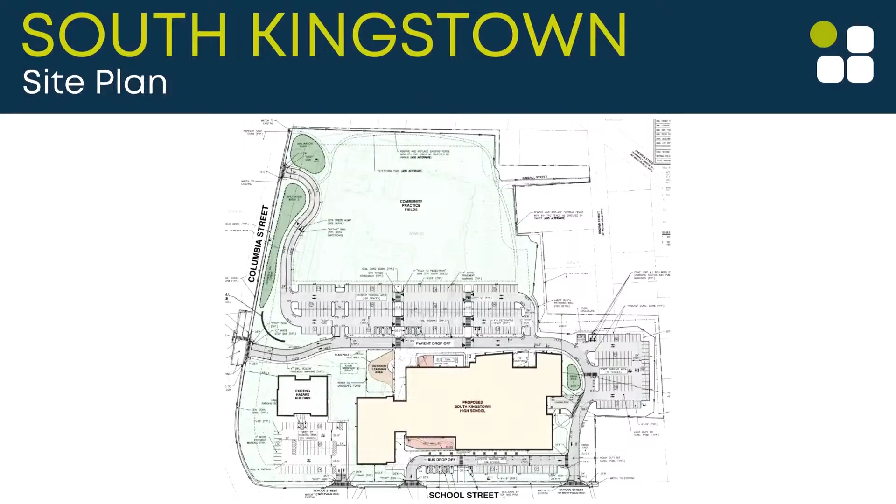With that, I'll turn it over to the design team to go through first the site layout and then walk us through the floor plans. These have not changed much since the last presentation, but we'll review them again to make sure everybody's familiar and up to speed, then go through our approvals.

I'm noticing right off the bat this isn't the latest site plan, so we should make sure, both on the website and with us, that this is updated. I'm looking at the dumpster location and a few bits we presented to the planning board, so we want to make sure whatever we put out is consistent. Will do, thank you.

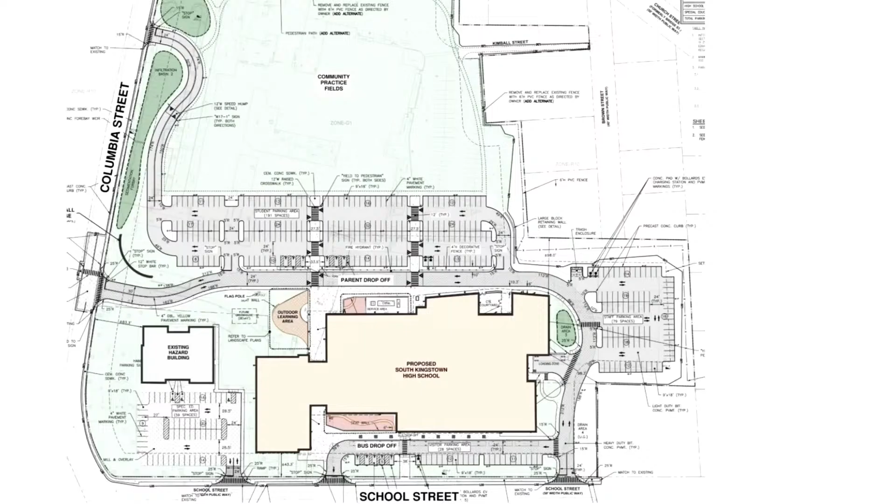The planning set that was submitted is on the website, and that's what we presented last week and received approval for. As Kate mentioned, the plan hasn't significantly changed other than relocating the dumpsters from the property line back towards where the cursor is in that area. The planning board meeting, if you had a chance to listen, was very thorough—felt pretty good about the comments we received. We'll work with the administration through the final planning approval process.

I want to answer any specific questions you all may have about the site. Anything you don't understand, feel free to ask now. Just a few things I think we should review, because not everyone was at the planning board meeting and some things have changed a little bit.

The vehicular flow for parent drop-off was one thing that was done late—I think we should bring that to the group's attention. And then any of the landscape discussions and commitments made with the planning board.

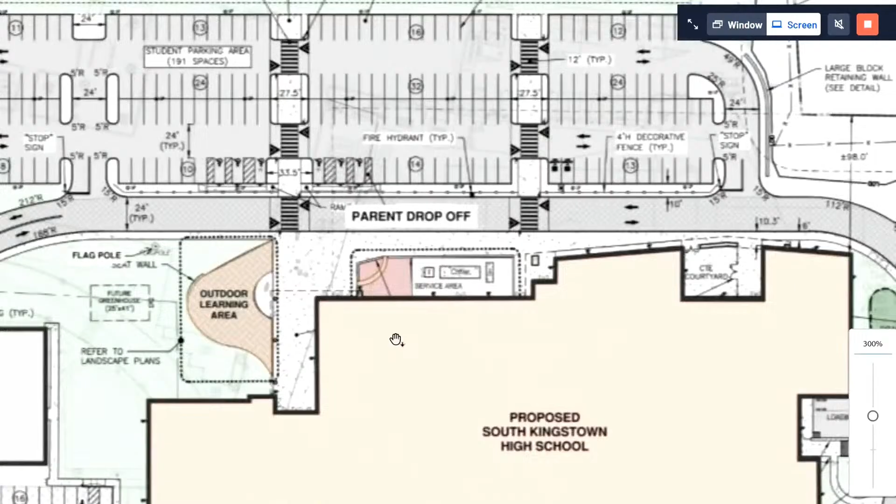Sure. One thing we talked about was improving pedestrian safety for students during pickup and drop-off. So if you look at the area marked parent drop-off, that section of road between the entrance on the left side to student parking and the entrance on the right side to student parking—during pickup and drop-off, that will be one-way only. That allows a disabled vehicle to go around, and also keeps people from dropping off students in the other direction and having them cross in front of vehicles. That was one of the features we modified and presented at the planning board.

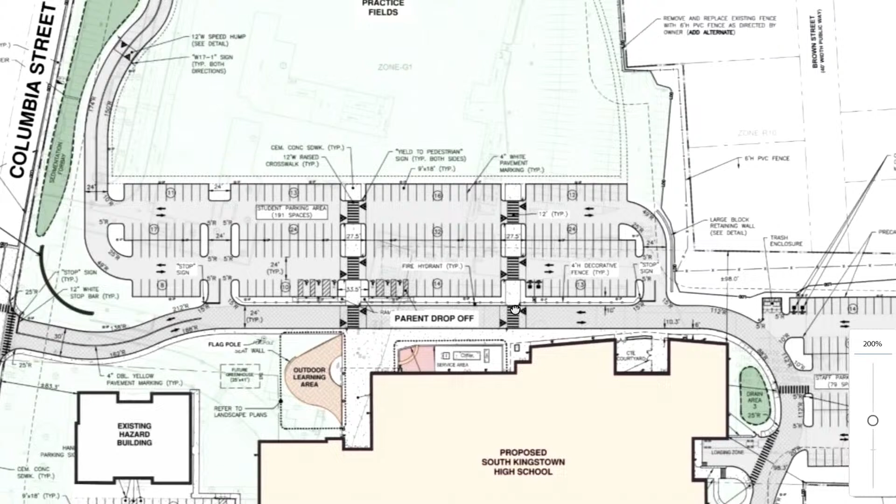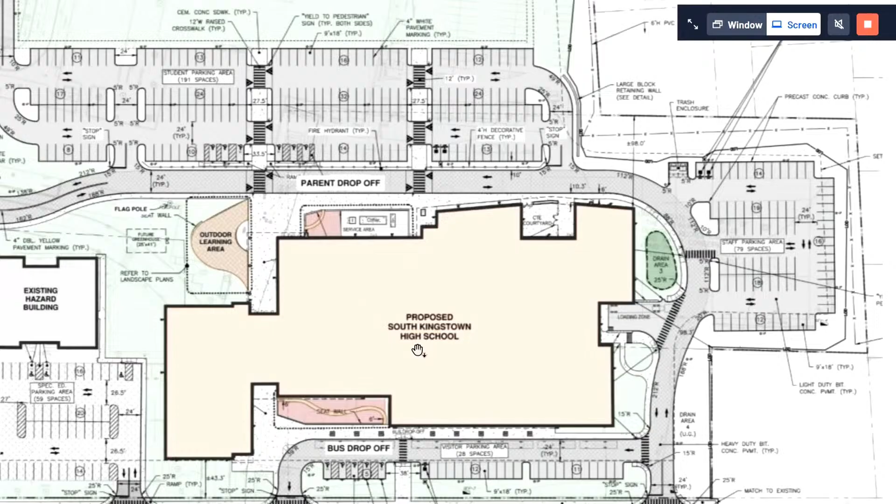The other is the landscaping. We did have to enhance the extent of landscaping—some additional trees and additional understory around the front of the school, along School Street, and along the student access drive. As mentioned, this package comes very late in the project, where we typically know where we are from contingencies from other previous buyouts, but we did commit to some enhanced landscaping in terms of trees and understory.

So to clarify with the parent drop-off—that is a two-lane road, but during 7 a.m. to 7:30 a.m., and then again in the afternoon, there'll be signs posted during these hours. The flow comes in and goes out—the flow never changes. What it does is just prevent oncoming traffic during pickup and drop-off along that section of road.

So there's an operational component to this as well as a signage component. Yeah, that's what I was going to suggest—it would be more a matter of training the people who then train the parents and visitors that this is what happens during these hours.

We did have a traffic consultant present along with us last week, and they have a report we'll be including in our submission to RIDE. That was an open item for them that we'll be able to close.

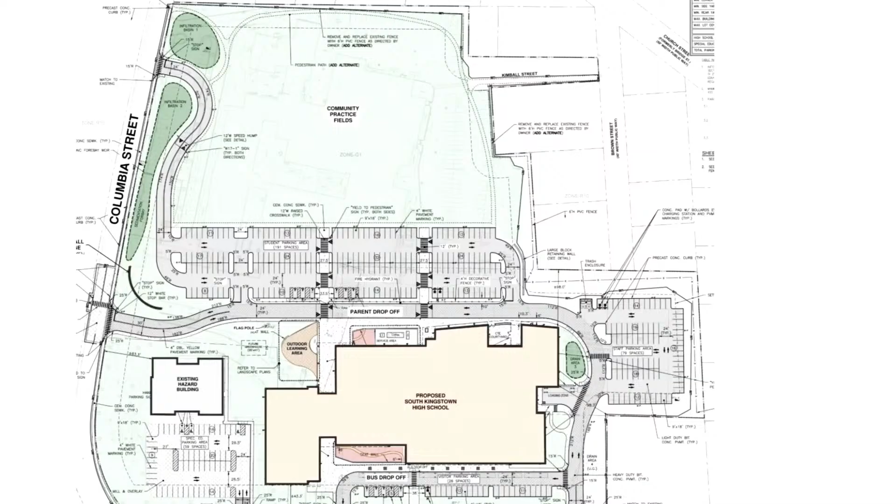So, Phil, if I have this correct on the traffic flow—the one-way operation will go from Columbia through the parent drop-off area and then exit out onto School Street, is that correct? Essentially, if a parent enters from School Street, they will not be able to drop off there; they will have to go into the student parking lot. If they so desire to drop off their student there, they can, but then the student is crossing not at appropriate crossings during pickup and drop-off. What we don't want is a parent coming down the same road that parents are going the other direction on, dropping off and letting out students, and having them cross not at a crosswalk but indiscriminately along that lane.

Got it. And a big part of this is going to be operation and how we train our drivers about certain times of the day.

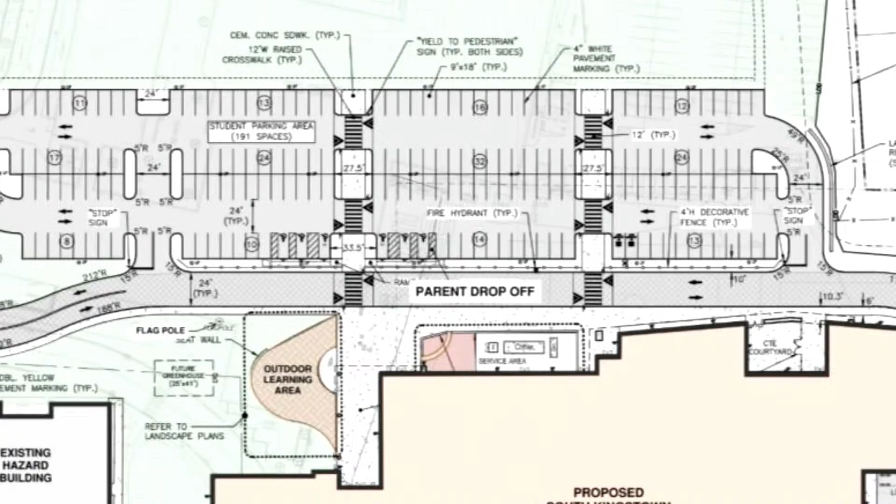I really think this is a very good site plan in terms of vehicular and pedestrian traffic. We have multiple egress points that make a lot of logical sense. There's nothing really illogical about this entire concept. That one component we just talked about is just another additional element that we're able to provide for the safety of the students, that's all.

As Luke had mentioned in his email, we only had one abutter who presented at that meeting, and we were able to address his comments. Okay, thank you. The only thing I'll say is on Thursday at the public forum, we will present the appropriate site plan.

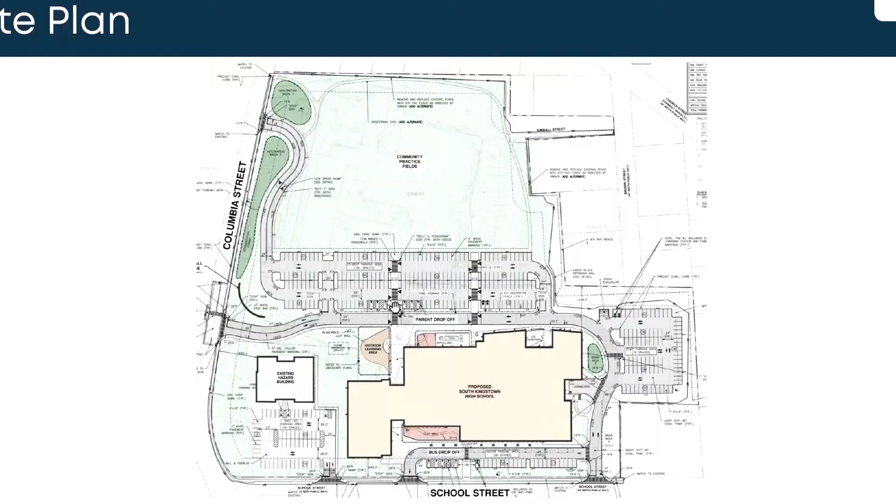He has it, okay. I was like, that's okay. I can't see that far. I brought my glasses just in case. I can see that far.

All right, nice to see you all again. I'm trying to think back to when the last time you saw this was. It probably hasn't changed a lot since then. All the key components are still in the same place.

The 3-story academic tower is still that yellow and blue on the left-hand side. The darker blue area is administration as well as nurse, with a few others, and the guidance suite is also in there. The lighter blue at the top is the cafeteria commons and the kitchen, so those two L-shaped spaces work in tandem. The big green space is all fitness and athletics and the gym, which has worked out pretty well as we've been recrafting things.

We had some issues with how our showers were laying out, but that seems to have worked out really well. We'll be seeing Terry on Thursday. The red spaces up in the upper right are still the CTE spaces for construction technology.

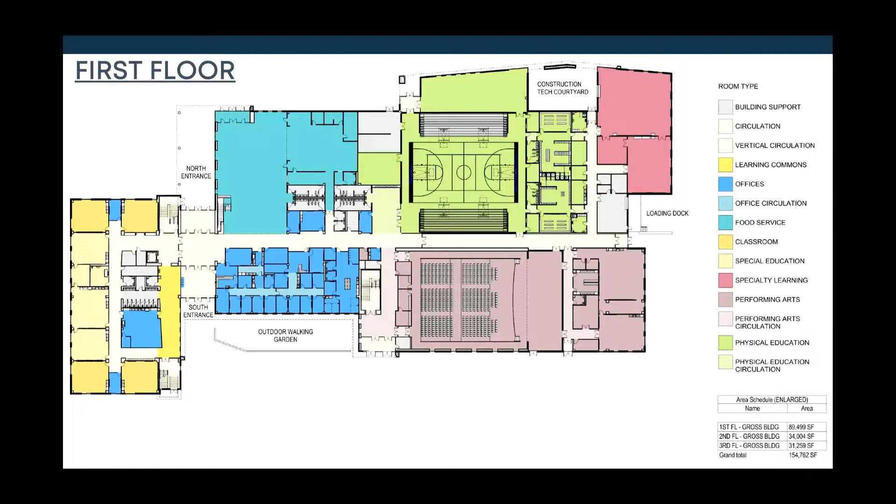To get big item props, construction pieces transported properly, without having to go outside, because they do create scenery and other stage prop pieces. There's a real nice synergy between those groups, and we have oversized doors, height doors, as well as tall corridors, so that can all take place without having to go outside and around, which you could still do, or really dragging your way through the building.

So if we go up one more floor, again that academic tower is primarily classrooms, the big blue space in the middle is the teacher workroom. So that space stacks on all 3 floors.

I probably should have talked about the darker yellow stripe to the right of that, which is a learning commons. Students would be allowed to come out into that space to work on projects. Chip has described it before as, instead of having them go out and sit on the floor in the hallway, they actually have a space with appropriate furniture.

Their supervision comes from the teacher room, which should always have somebody in it. We have a lot of windows onto that space, so supervision of what's going on over there comes from a variety of places, and it'll be a nice bright spot for students.

The purple spaces are art spaces, and the red one on the end is actually a combination art and CTE space. And then the media center is across the hallway from that, and it has the overlook into the 2-story learning commons cafeteria.

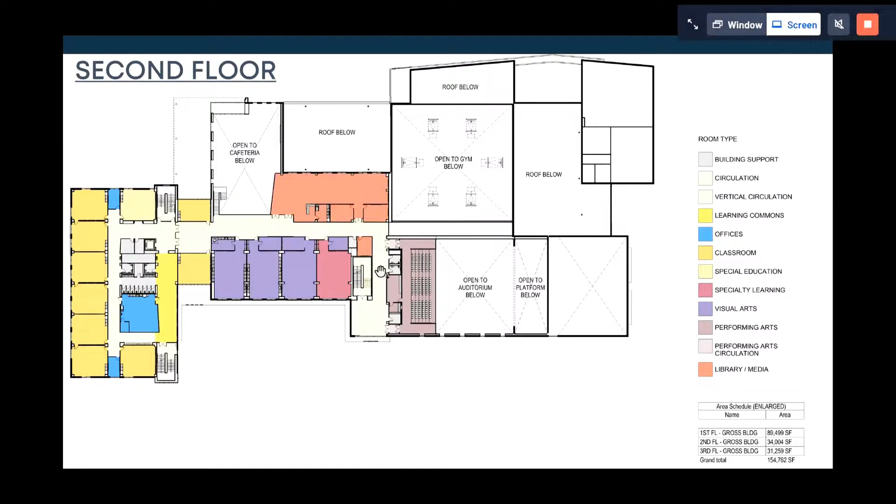And obviously the balcony—I should never forget the balcony. It's still there. Then the third floor has the same footprint for the most part, with the exception of the science spaces, shown in butterscotch, and the redder spaces which are CTE programs. Those all live together in that wing and have a lot of synergies between the activities going on in them. So that seems to have laid itself out really nicely.

Any questions about how this is all coming together?

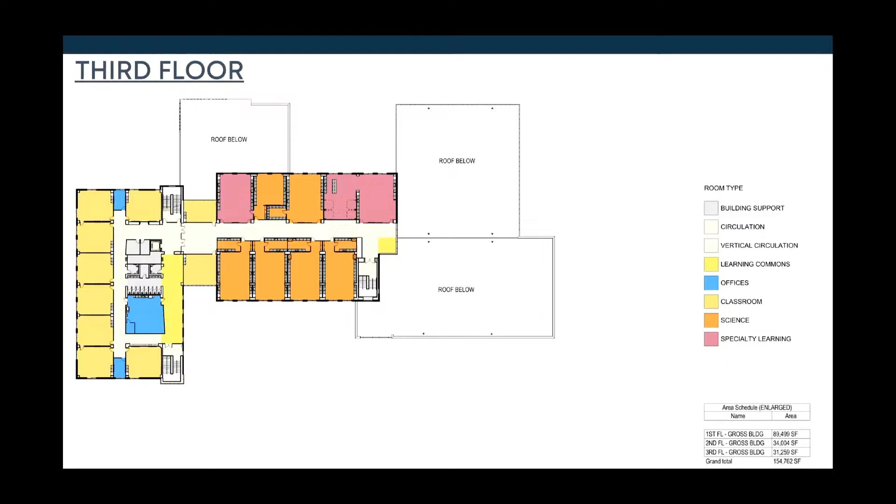Do we have the exterior renderings? Okay.

I'll preface this by saying there'll be a little bit of tweaking as we step through the VE items mentioned before—nothing substantial, it's still going to look very much like this. We got a little bit, and actually this side stays almost entirely intact.

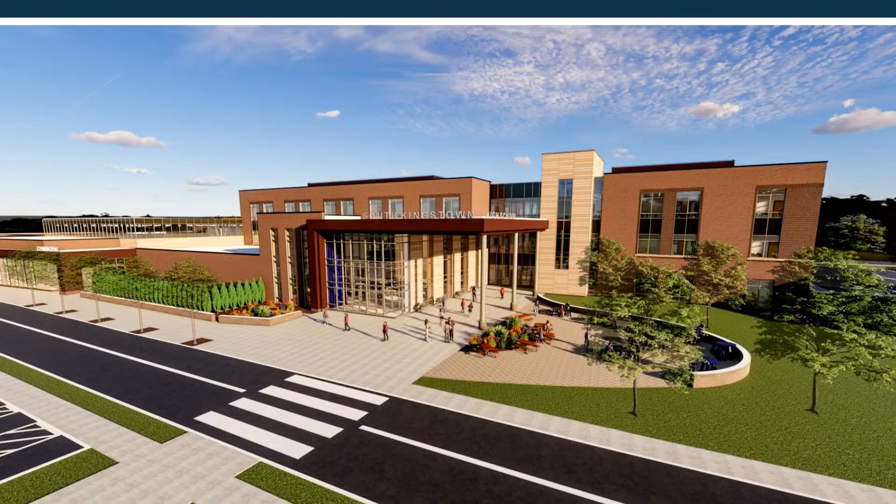So this is the back, where students are going to get dropped off. That tall space with the glass in front is the end of the cafeteria, a two-story cafeteria. The glassy three-story connector at the end of that overhang is on the first floor, where you're coming in from both sides—it's really light and bright, with transparency all the way through the building. The tower piece is the stair tower, and the stairs go all the way to the roof, which will be nice for maintenance people who need to get up there with equipment and tools.

We do have some screening of mechanical equipment on the roof, and a really nice outdoor teaching space, as well as overflow space for students who are allowed to go outside during lunchtime. They can be in that horseshoe-shaped outdoor space with a seat wall and other ways to contain them so they don't wander off the reservation.

So if we go to the next one—doesn't want to go. So this is a close-up version.

I think the other one that comes after this steps back a little ways, but that is the main entrance from School Street. Right now we're talking about having a garden, which could be used before or after school, but also when there's an event in the auditorium—if people come out at intermission and want a place to sit at a bench, take a little walk, or do whatever they do with their phones off to the side. It also gives some nice native buffer vegetation between traffic and the building, with a little row of trees.

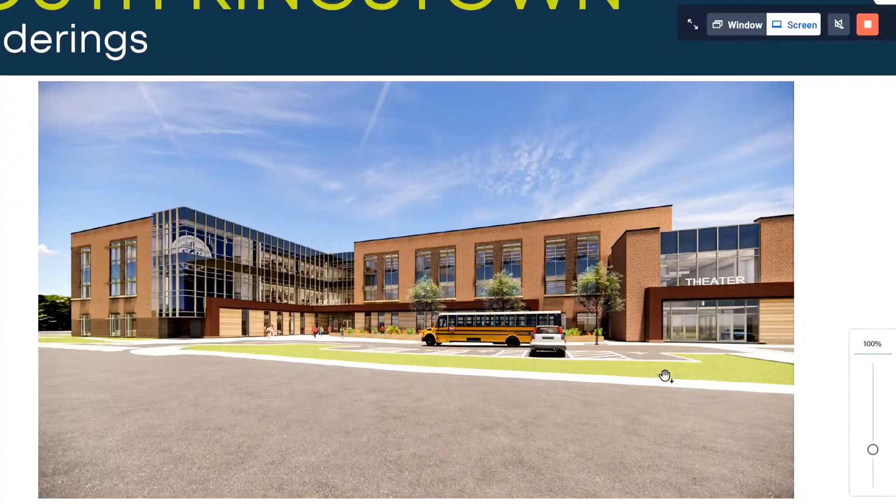So here's the backed-up version of where we just were. One of the things we're looking at changing a little bit is there's a big swath of glass on the left-hand side, second and third floor—it's a little too much glass. So it's one of the places we're looking at for the 10% reduction in glazing we were asked to take a look at. That's going to get tempered a little bit—it's not going to all go away, just treated a little differently.

But the rest of it—the theater entrance is still there, the main entrance is still there. We're going around the building tightening things up here and there. I think that's the last one. I'm not sure—so I have a question on this view.

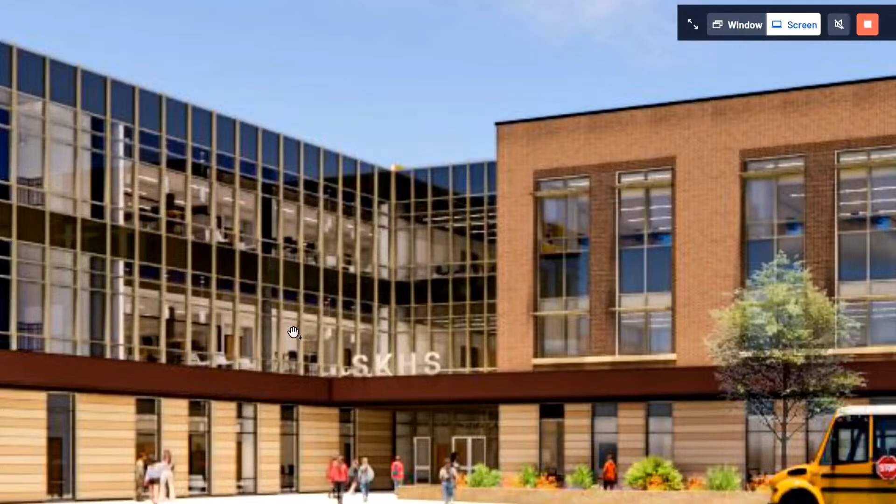So the front here is the stairwell that goes all the way through the building to the other side—yes, that will still be transparent like it is on the corner. And then inside that little L is where the Learning Commons is, like where it says SKHS right above that, that darker yellow strip we saw. Yep. And so we kind of like the treatment downstairs a little better, where it's not completely transparent through to that Learning Commons space.

So this will give a little bit of space, it'll actually provide some places where they can put whiteboards and things on the walls, so when they have breakout spaces out there, they're a little more usable.

So my only other question is when it comes to that SKHS and the theater lettering, is that going to be part of it, are those going to be actual letters, or is this just saying 'this is the theater'? No, we're intending, unless there's a reason to change them, which we can talk about, that they would be actual letters standing up there. We probably need to tweak the color, whatever the color of them becomes.

Yeah, I was just curious because they were a little hard to tell in renderings, sometimes they block things, because if we make them dark, they disappear and you can't tell that they were there at all. As opposed to in real life where they do stand out.

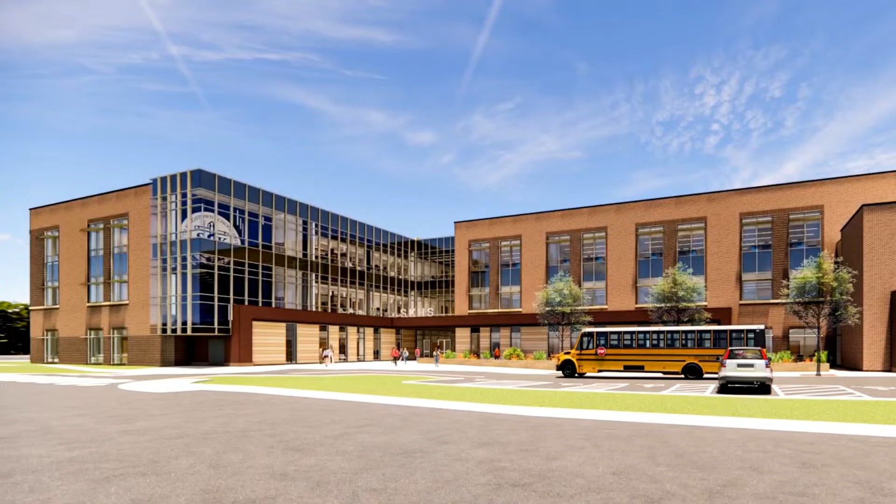Okay. And where you were talking about the stair tower, the very glassy corner farthest to the left, we had talked last time, or Mark had talked last time, about the blue on the outside of the building moving inside. That's one of the places where, if everybody's in agreement with making a blue statement, it would be an indoor place that's pretty prominent from the outside, but because it's inside the building it's a little more protected, and we can get the right color and make sure it doesn't change over time like some outdoor materials tend to do with those deep blues. They're not as stable as we might like.

And that's a stairwell, right? That is a stairwell. You can sort of see in there the little bit of stair coming up and going down. Does anybody have any questions or comments?

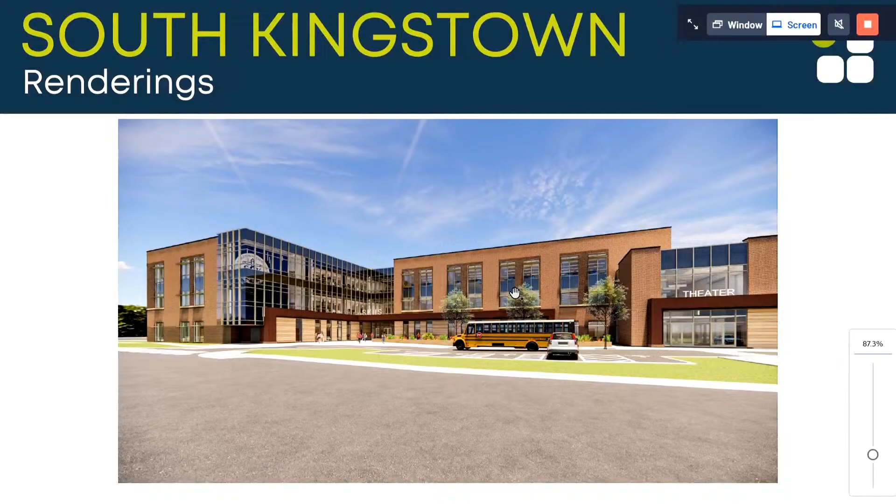Could we go back to either the floor plan on the second or the third floor? Sure, our navigator will get us there. Sorry, Lou.

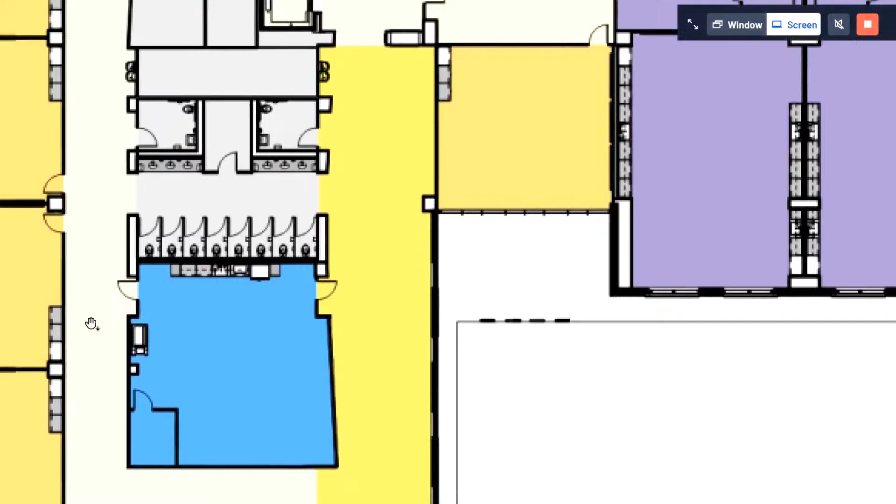There's the second floor. Could you give me an idea about the scale of that common learning area? The yellow? The yellow to the right, yes. So that is, let's see, a typical corridor on the other side. Can you zoom out just a little bit farther? So the corridor on the other side would be... yep, how wide? That's what I want to see.

So that's like 10 feet wide on one side, and 8 feet wide on the skinny side, where the little hand is. This starts at 12, and I think it gets to almost 16 when it flares out a little bit up towards the top.

Okay, so one of the things we're going to have to work on as we move forward, in conversation with the fire marshal in particular, is they often ask us to mark the floor so that everybody, students and everyone else, understands that the movable furniture doesn't get dragged over and left in the aisleway that's meant for egress. We typically do that with a flooring change, which is pretty easy for everybody to understand. Keep it on this side, not that side, because that is important, since it's an egress path to get down to that stair tower. Got it, okay. Yep, thank you.

Sure. How come it's tapered like that? Because the design team liked the flare they got on the little corner down there. Architects. You're a bunch of architects, artists. Every now and then we have to do something. The flare? You have a little flare I'm sorry at the end there. So you have it, to give him something. Mark didn't do it to the building, so he did it someplace inside. You got to throw him a bone once in a while.

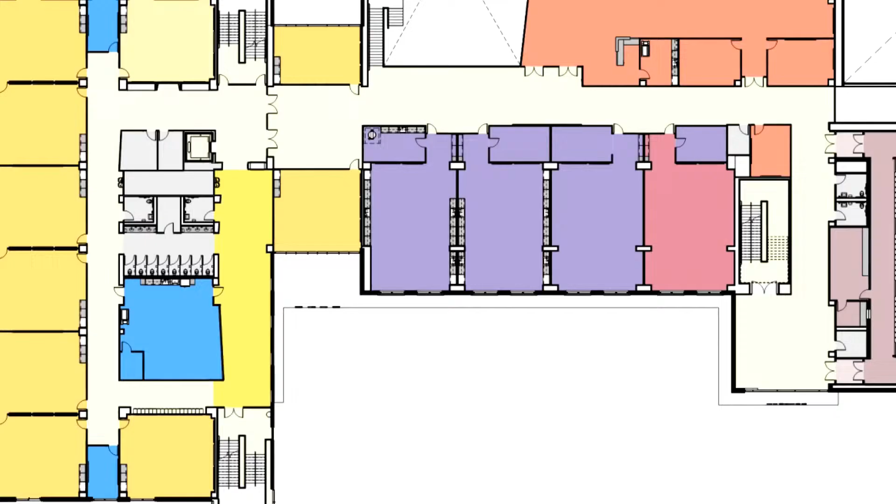The flare of the teacher workspace? Actually both spaces, because the dynamic of that, just that little 3-degree shift on that one wall, will actually change your perception of how that yellow space feels, as well as, there's a lot of glass on that corner of the blue space. You notice it. Okay, all right, I've got that. Yeah, thank you.

And it's not curved, because Tony from Gilbane doesn't want us to build anything with a curve. So straight's okay. Yeah, I actually like the crooked.

But yeah, I agree with reducing the glass so they have some space to work with. Same with the teacher offices, they're not going to want a full glass wall. It's not full glass, but they're going to have... I assume cubicle type setups in there for the offices? I wouldn't call them cubicles, I would call them workstations, not necessarily with walls around them, but yes, they will have desk spaces. I forget how many ended up in each one.

And Chip's on board with that? Yep, understood. Yep, we've worked with him through that.

When you do the flooring change, the only thing I'll say is maybe something like a carpet tile or something, just to keep the noise down. That's going to be a kind of loud area. We need to have conversations with you about what floorings you do and don't want. We've had some schools that don't want any carpeting out in corridors, just because of maintenance. We've had other schools that don't want them anywhere in their whole building at all because of allergies. So we need to have those conversations. We've made assumptions in what's been estimated, but those things could be adjusted.

I like them because when you're putting the furniture down, like say along the wall, separate from the clear fire egress corridor, it keeps the furniture over there. It keeps the tapping feet down. There's sound absorption to it. And then when you put stuff on the walls, panels and stuff, because otherwise it becomes a kind of chatty area and the noise will just bounce all over the place.

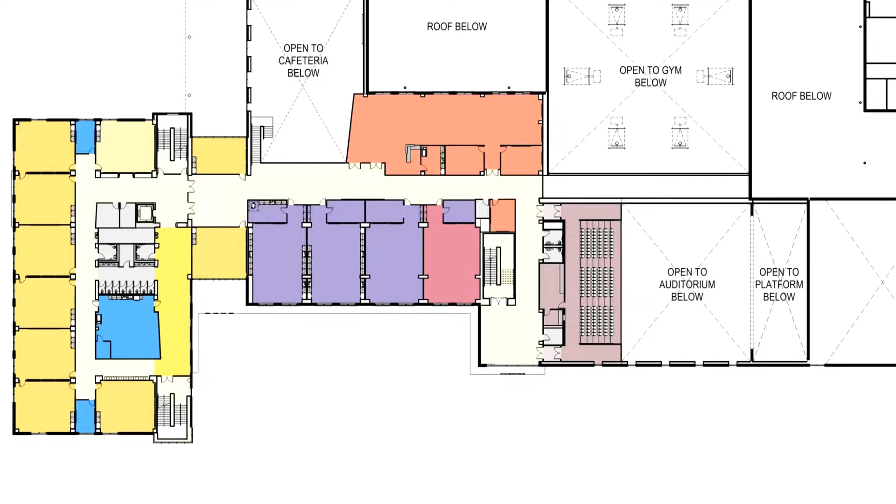Going forward, we haven't shown you anything really on the inside of the building yet - finishes, what it looks like - that's a really big next step. Similar to how we had conversations about the outside of the building and what the materiality of it is, we're going to be having those conversations and then bringing things to you guys to make final decisions off of. So that will be in short order.

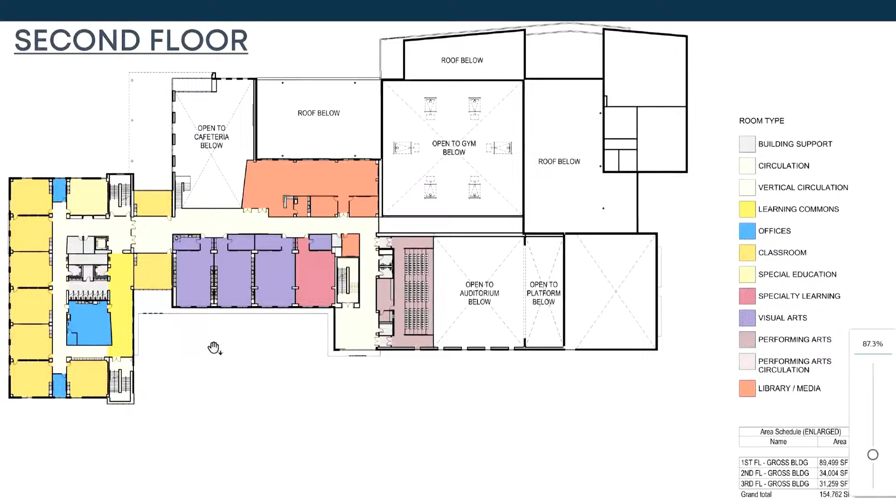Yeah, well I guess the takeaway from there is that we really like the outside now. We're not even talking about it anymore. That's good. I'm so happy to have made it to that point where we can jump in and focus our attention elsewhere. So thank you.

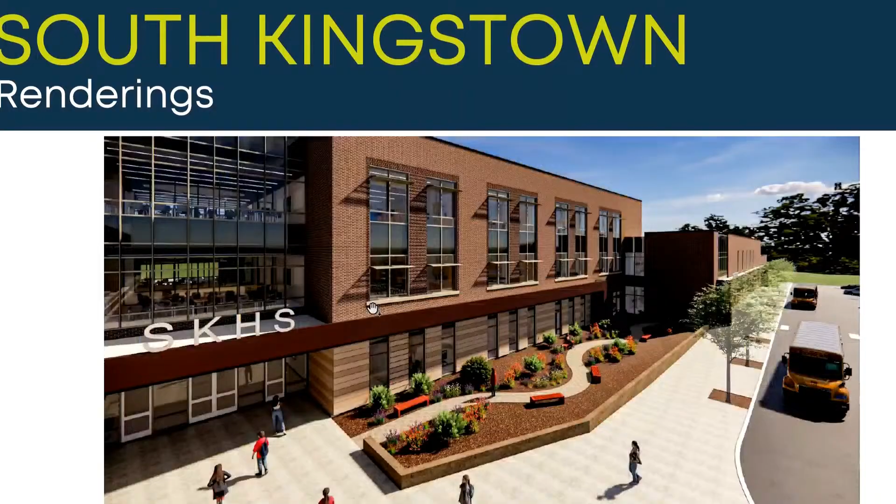Kate, is this an additional, a separate, or did we keep this as a separate agenda item? The cost containment? Yeah, it seems to have merged already into item 4, so we can just keep going through this, and then at the end we'll do item 4 as the actual motion for the recommendation. So we'll just keep it going here.

All right, so the first item that we have - again, these are areas that are continuing to be explored. We are not asking for a decision on this yet. We will come to you with much more information when we do ask you for a decision on this. This is the first item that Kathy was just referencing, the reduction of the exterior glazing. So we're targeting a 10% reduction in curtain wall and storefront. In addition to this, there's another area in particular that I have my eye on, and it's a storefront perimeter around the gymnasium. There are much more efficient ways to get natural light into the gymnasium. So again, these are areas where we're not impacting program. We finally got to an exterior that everybody likes. We don't want to change it. We're not looking to make any major modifications to the exterior. These are select refinements at this point.

I just want to put it out there, I would be interested in hearing the architect - they're going to go back and do it, right? Yes, and I know you're eyeballing above the auditorium. I would like to give them an opportunity to justify it if they do come back with it, to at least explain why. Because I honestly don't know, but I can tell by the gestures and looks that some may not agree with that. That's fine, but I think we need to have that conversation and understand the plus-minus of it all. Yes, absolutely. Again, we are not asking for a decision today. We do not have enough information to present to you to ask you to decide on this, nor do we need to decide on this right now. This is not part of our early release package. This is something we can take our time to thoughtfully design and make decisions on.

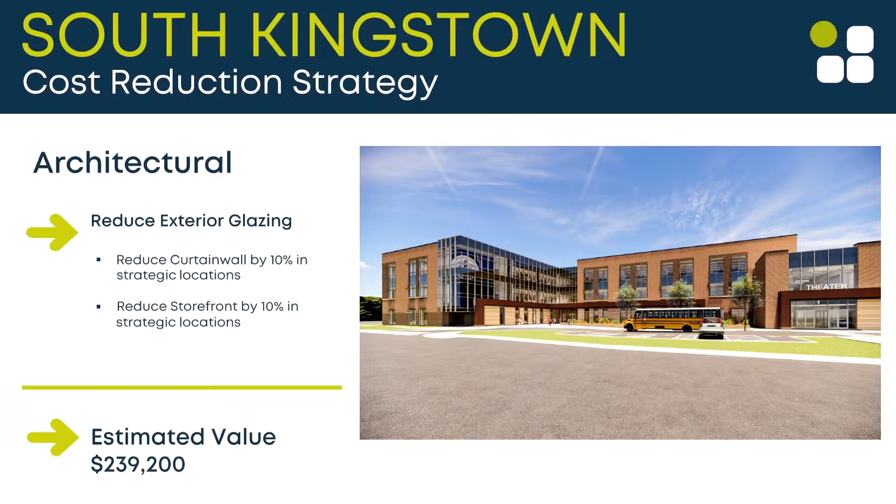The next item is fritted glass. We currently have 100% of our glazing utilizing a fritted glass, which is a stippled pattern. It is a bird-friendly frit, and it also provides a certain level of thermal properties. The design team is studying this. It is not currently part of our energy model. So if we did eliminate it, it was not part of our energy model to begin with. The design team is doing additional due diligence to determine the impact on our energy model by factoring in the frit. At a minimum, we are looking to reduce it. It is currently on 100% of the glazing, which is not necessary. We are looking to identify the most impactful areas for this treatment. The total value of all of the frit, 100% of it, is $600,000. So we're continuing to study its impact on our energy model and looking at strategic reductions.

Is the $600,000 more, or is that the glass cost? No, 600 is just the frit, it's the extra cost. That's it, just the extra.

Well, there's a lot of glass, and we have a lot of dumb birds, and I've been dealing with them everywhere I've been when I have buildings like this. So I'd be careful of getting rid of too many. Or John will be putting up stickers of seagulls on the glass anyway. And they still don't work. So this is an area we are studying, we are not recommending a wholesale removal.

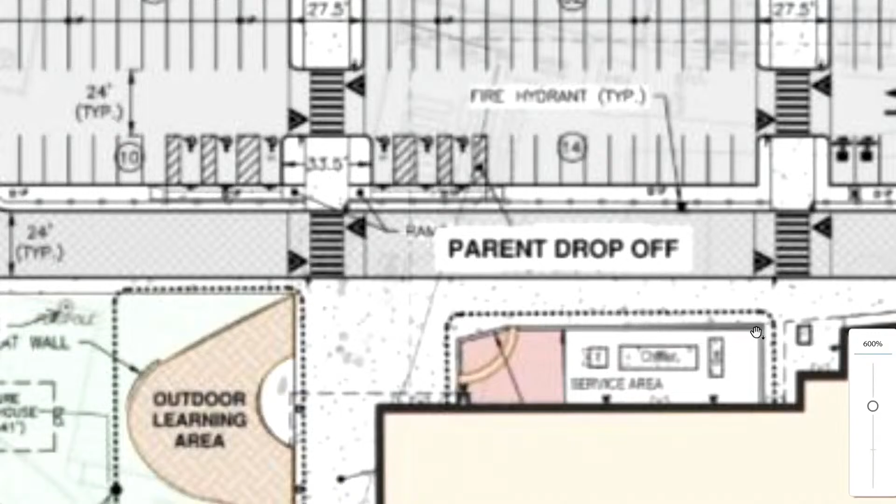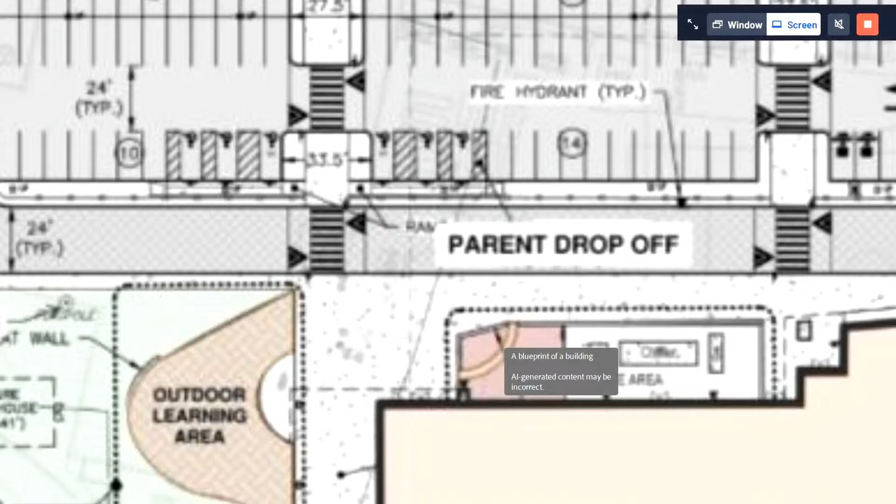Just a suggestion, and while the team's here: there is a seat wall around the service area with the generators. We've talked about this, it should have a fence since it's an area we should not have anybody in. Typically you'd put a fence around this. I don't see a lot of impact on removing that wall, because there are plants specified there that are going to overgrow the wall and get into the utility bins regardless. I'd suggest there's quite a bit of wall there, so the 10% reduction could come out of that, and I don't think anybody would ever notice. That would be my suggestion, because I'd hate to lose anything in the outdoor learning area or areas where people are actually going to sit and use the wall as intended. Just my 2 cents.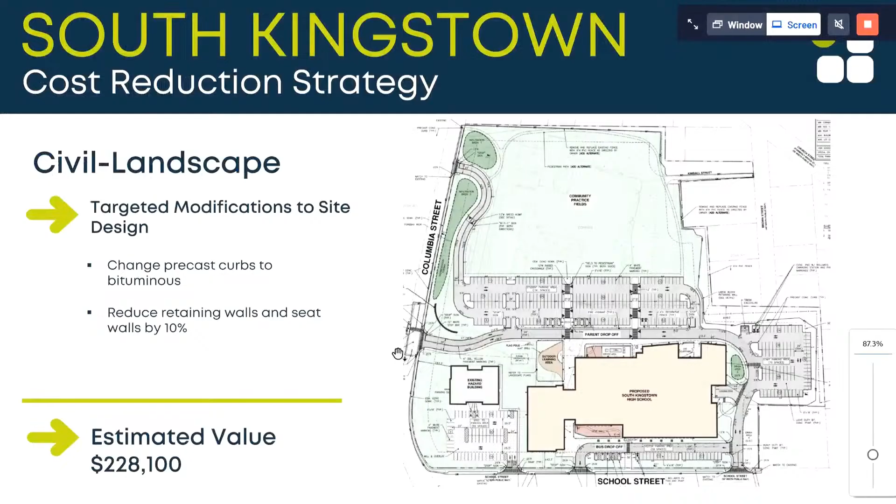And it won't touch capacity? Not capacity, this is rigging, lighting, that sort of thing. Anybody else have any questions, comments, or 2 cents to share?

I'll just add that we are seeing the theater people on Thursday as well. Yes, for the record, the design team is meeting with the theater team on Thursday to review this.

What are the estimators used for? I saw we had like a 10% reduction. Well, I'm thinking in the gymnasiums, with the 6 basketball nets, there's a lot of expense in the manual versus automatic raising and lowering of the baskets. Do they estimate with mechanical, or do they estimate with manual?

I think we need to always start with the motorized ones, speaking for me. Right, because they're harder to crank and the whole thing. Right. Currently, they are motorized.